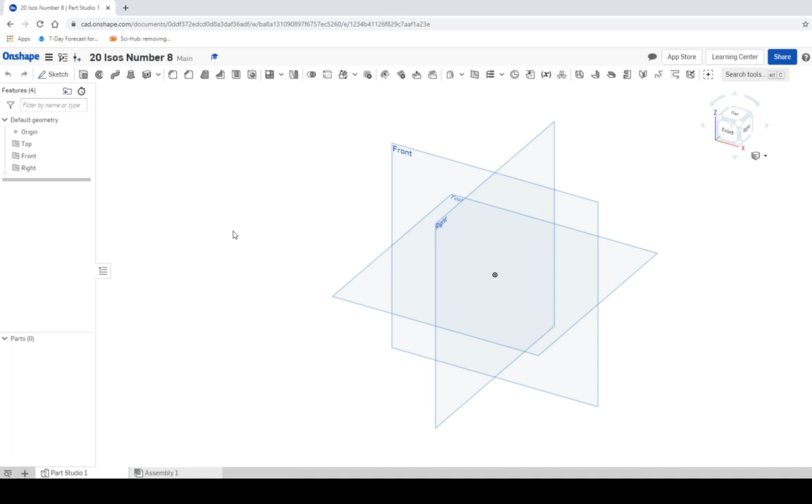This is 20 Isos number 8, so I'm going to create a document, call it 20 Isos number 8. Okay, and we're going to go to the top view, make a sketch on the top view, and just like always, double check, make sure 8 by 5 for the base. So when I make my rectangle, we're going to go 8, enter, 5, enter,

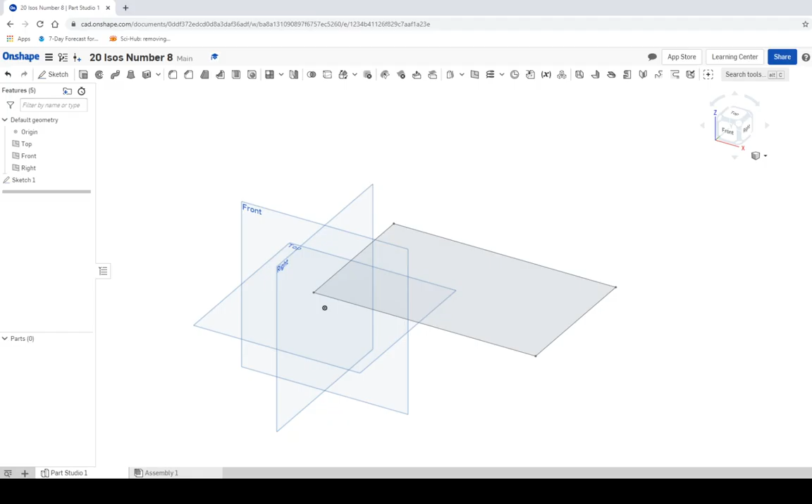green check mark, and then we're going to go to the isometric view, and the height is going to be 6. So when I click on extrude, we're going to extrude with a depth of 6. Click the green check mark. Here we go. Now our chamfer, let's take a look and let's analyze, because we've got our block. Now we just need to make the cuts inside the block to make sure that it works. So let's take a look and see what we can do.

I'm going to look over at the, here we go, chamfer, and it looks like we're going 1, 2, 3, 4, 5 across, and 1, 2, 3, 4 down. So that's 5 by 4. We're going to have to use a 2-directional chamfer to get that to work. So I'm going to go back. We're going to click on our chamfer button, and here it is.

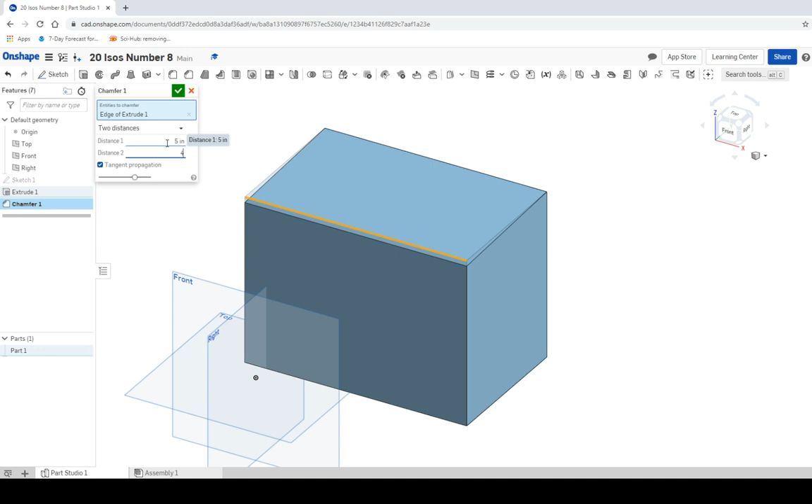Click on the edge. We want to make sure that instead of saying equal distance, that it says 2 distances. Distance 1 is usually the x direction, so I'm going to call that one 5. And distance 2 is the y direction, so I'm going to call that 4. And click it. It looks good, so I'm going to click on the green checkbox. And we have a chamfer that goes from the top all the way down to the bottom.

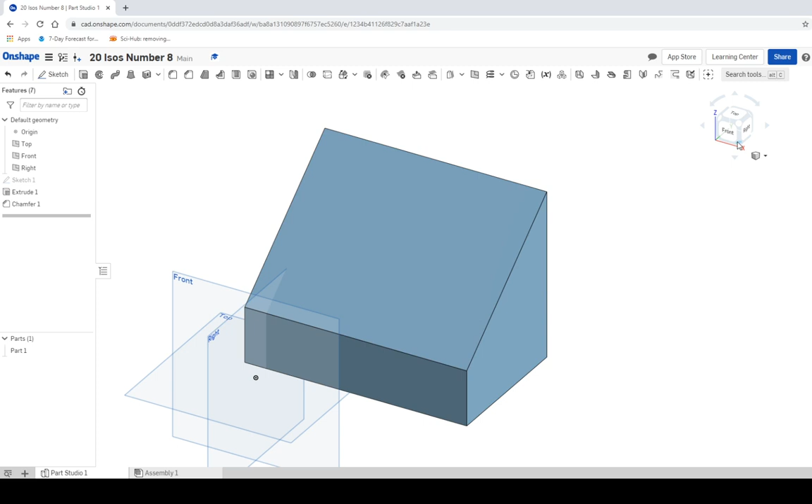Now we need to worry about taking this chunk out of the side. And we don't want to make a sketch on the top part, because if we do, it's going to try to like cut diagonally into it, and we don't necessarily want to do that. So I'm going to flip over to this side so that we can actually see what's going on down here. And let's reference our triangle. Our triangle is 1, 2, 3 in the x direction, and 1, 2, 3 in the y direction.

So what we have here is a 3 by 3 triangle, so we can just use the 2 ends to connect the dots after we're done with that. We don't have to worry about the length of the side. The Pythagorean theorem, I mean, you could do it if you want to, but I would rather just make the 2 sides and then connect the dots between them.

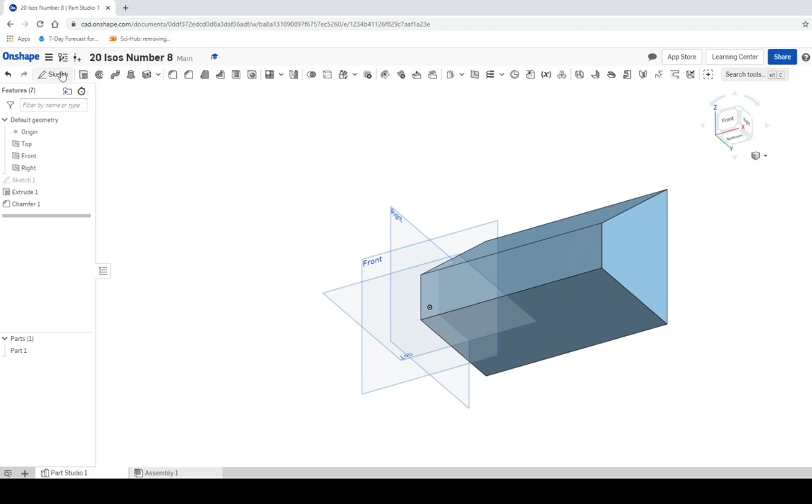So here we go. I'm going to click on sketch, and I'm going to click on the bottom of the shape. Okay, then I'm going to go to the bottom view, and we're going to make a line that goes out 3 units, and then we're going to make another line that goes out 3 units. Make sure you can hit escape if it kind of tries to connect the dots for you. So we're going to go 3 horizontally and 3 down.

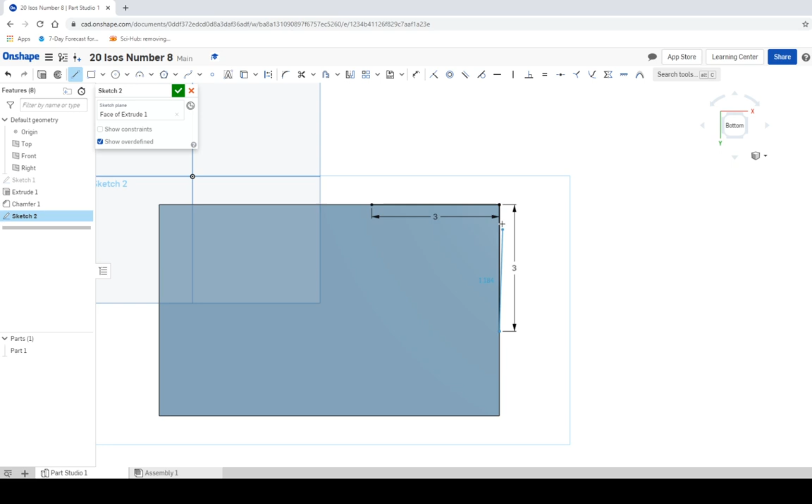Then you can use the line to just connect the 2 dots together with a length of 4.243. Who knew? Pythagoras did, but you know, we can just connect the dots. Click the green checkbox, and it looks like we have a triangle set up. Let's flip it back around, and we'll hit the extrude command. Let's go to click on the triangle, and then we're going to click on remove,

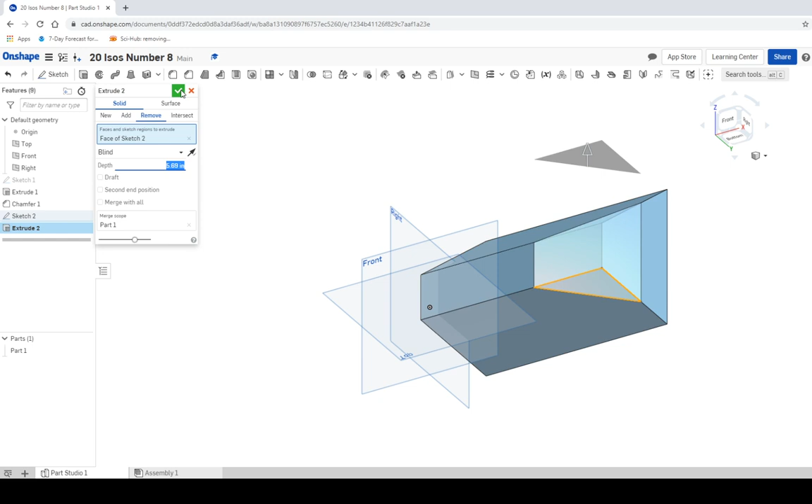and then I'm going to just take that arrow and I'm going to drag it up so that it cuts off everything. And then I'm going to hit the green check mark. Let's check it, make sure that it looks okay. I'm looking at it and I see that we have the shape up here, the shape on the side. I think we're okay. 3x3 looks good to me. This one is 20 Isos, number 8.